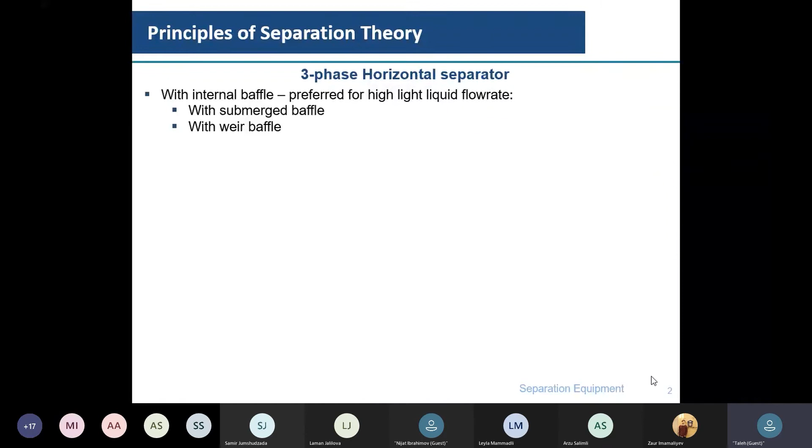This weir can be a submerged weir or submerged baffle. The second type is the weir baffle. In this picture, if you see my cursor, that's our three-phase separator.

Here with submerged baffle and with weir baffle, it means that in case of the submerged baffle, normally because after the weir we are collecting only oil liquid, our normal liquid level of the oil in this section is always higher than the height of the weir.

But in case of the weir baffle, we are always overcoming this weir in order to separate the oil liquid from the heavy liquid.

In the second part, we are using the separation boot. It's preferred for really low heavy liquid flow rates. And here, as you see, again it's a three-phase separator.

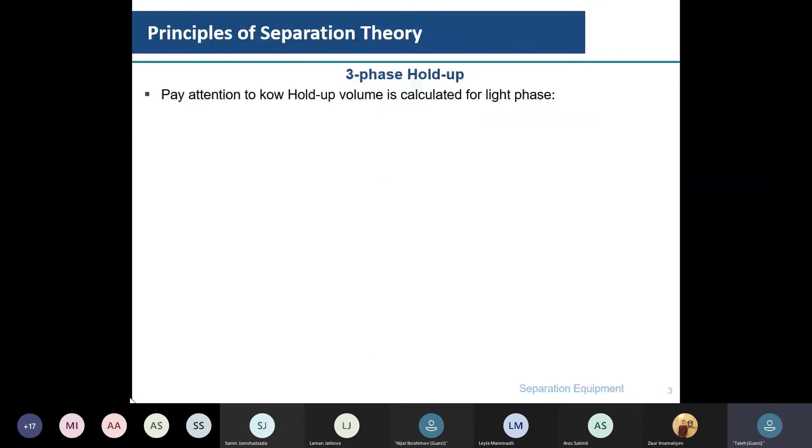Now let's go to the hold up - let's say the hold up volumes of the phase separators with internal baffle or with weir. Okay, that's our illustration.

Our oil level is always higher than the height of the weir. That's why, and we know that by considering the Bernoulli equation and the fundamentals of fluid dynamics, we know that we should normally have the same height here. Actually, we have some fluctuations, but in ideal cases, we have the same level.

Okay, always we are transferring our oil from this side to the section after the weir.

But in case of the weir baffle, we are always overcoming our weir. That's why we have the normal liquid level for the oil flow rate lower than the height of the weir. But here, the normal liquid level of the oil, even after the weir, is higher than the height of the weir.

And for the three-phase separators, in case of the boot, we are just simply having these hold up volumes. Let's again define this blue as our oil, and here we are collecting our water.

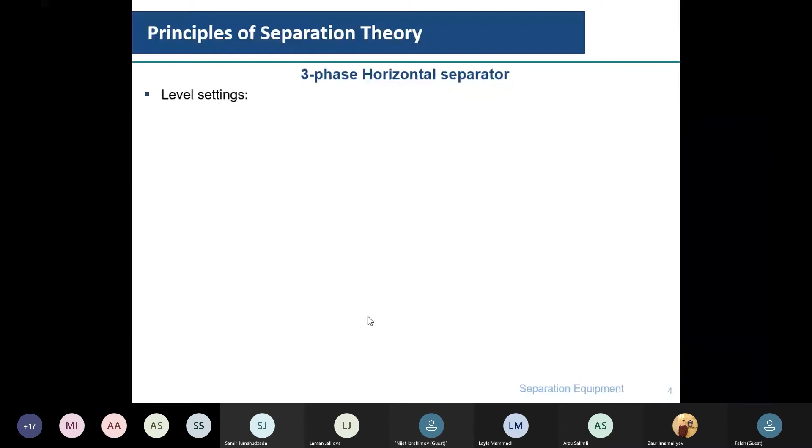The next step is about the three-phase horizontal separator level settings. Here for the feed inlet we are using a reversed pipe, but that's not the only rule. We can use several types as mentioned in the previous session.

In case of two-phase separators, we have only high level, normal liquid level, and low level, because for two-phase separators the liquid is only one phase. Inside the separator we have both the gas phase and liquid phase.

But in case of three-phase separators, we define it this way: that's our feed section, we have the gas phase, the light liquid phase, and the heavy liquid phase. That's why we should define and control the levels of each liquid phase.

Here we see high level, high level, normal liquid level, and low level. And here we see HHLIL, and here I is resembling the interface.

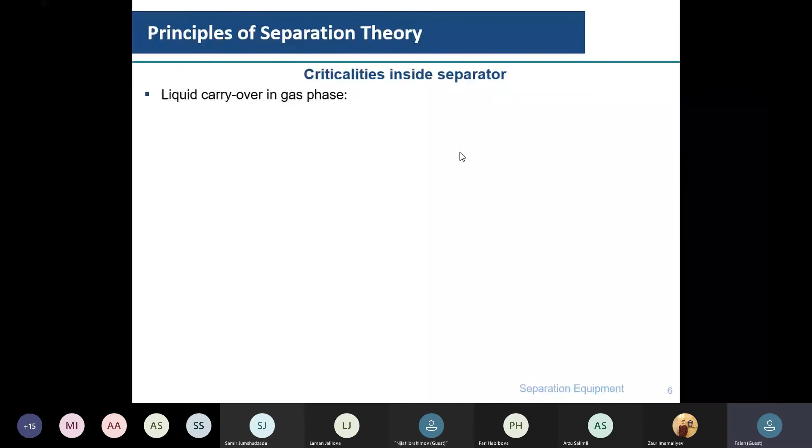What's liquid carryover? It means that the gas phase, the separated gas phase, takes some liquid molecules from the top of the liquid level, so the liquid phase is losing some already separated liquid particles in the gas phase. This affects our separation performance and the product specifications.

Liquid carryover is always present to some extent, but if it's unexpected, or the amount of liquid carryover is unexpectedly higher, in that case we can also lose the product specifications.

What are the reasons for the liquid carryover? The first one is excess gas velocity. In case of elevated gas velocities, we can experience liquid carryover in the gas phase.

The second one is the unexpected high liquid level. In the first case, we are giving energy to the gas phase because it has a higher velocity, and that's why it has more energy and can take liquid particles. In the second case, unexpected high liquid level, we are giving the possibility, not the energy, to the gas phase to take the liquid droplets, again liquid particles.

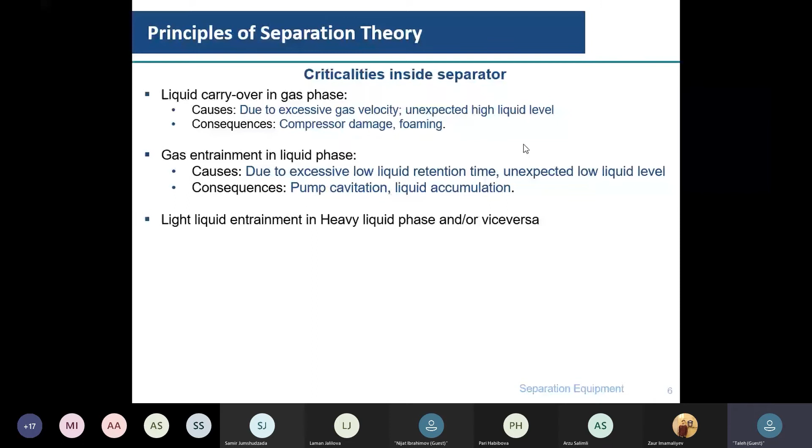And the second one is the liquid accumulation. It can cause liquid accumulation in the separator. The third one is actually the liquid carryover in gas phase, gas entrainment in liquid phase. The third one is the light liquid entrainment in heavy liquid phase, and vice versa. Actually, we also have heavy liquid escaping in light liquid, but the important one is the light liquid because the light liquid is much more precious, let's say the phase for our inside the separator, because mainly the light liquid, for example in case of oil plants, the light phase is defined as oil. That's why we don't want to lose our product, because in this case we are losing money. Okay, what are the causes, or what are the parameters that affect this entrainment?

They are the viscosities, densities, and the drop diameters of the liquids. Okay, and the bad sizing. In case of the bad sizing, it can actually be defined as...

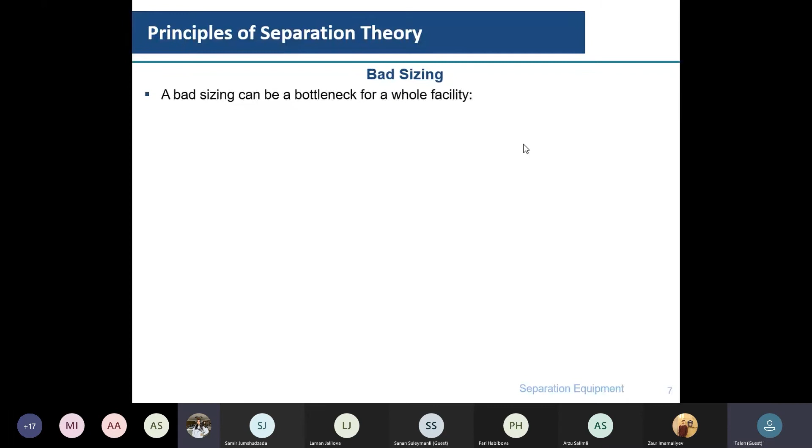Can I ask one question regarding liquid carryover? Sure. So you said that one of the consequences can be foaming. Could you please explain what you mean by foaming and how it will happen? Okay.

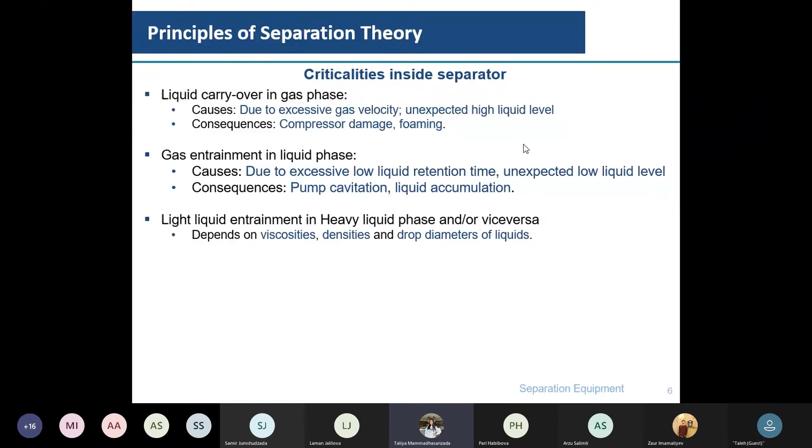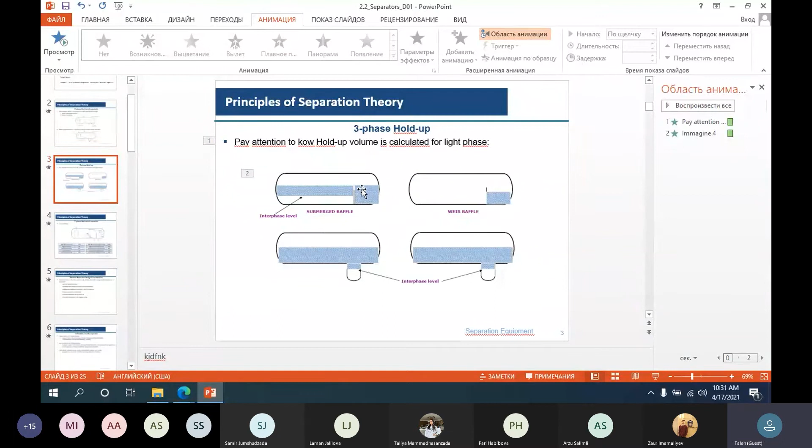Now let me take this one picture of a separator as an example. Let's say because we have the gas entrainment here, sorry, we have the liquid carryover here. Let's say that's our gas. What was your name? Sorry, I am Taliya. Taliya, please, in case of any doubts, just stop me and ask your question. Let's say that's our gas phase, right?

It enters and takes some liquid particles from here, but after taking the liquid particles, we don't have a smooth stream for the mixture of the liquid phase and the gas phase. Since our liquid particles are a little bit heavier, mainly we have some fluctuation, like a fog here, because the gas phase cannot take out all the carried liquid particles abruptly from the separator. That's why some of them are collected here for some period of time, let's say 2 seconds, 3 seconds.

But because it's a continuous phase, we have continuous foaming here. These gas phases take some gas particulates and liquid particulates here, and just leave the separator. But not all the liquid particles carried in the gas phase can escape the separator. Some of them are collected here, because we still have this gas stream, and because of the drag forces, because of the potential of these gas phases, these liquid particles are suspended here, kind of suspended, and they are making the foams in this section of the separator. I don't know if it was clear for you, Taliya, or not.

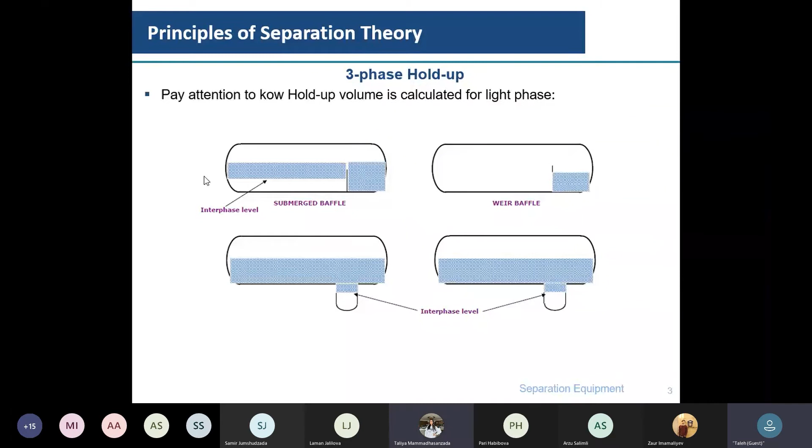That was clear for you? Yes, it's clear, thank you very much. Yes, that was the last one.

Okay, I think we were here. We have concluded light liquid entrainment. Now, the bad sizing. We can define that the bad sizing can be the bottleneck for the whole facility, because if our separator has not been designed properly, all the criticalities we have regarding the facility, the whole plant, will be those of this separator. That's why we should design the bad sizing properly.

We must always design our separators perfectly. Since we are now talking about separators, I am referring to them specifically. Firstly, if we have improper bad sizing, what should be the consequence of this?

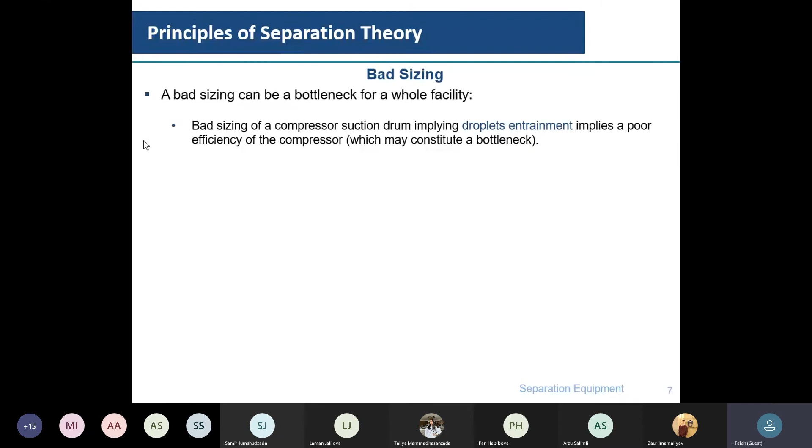If we have, for example, the suction scrubber before the compressor, and if we have not designed our suction scrubber normally or perfectly, in that case we can have liquid droplets at the compressor suction, and it can be very problematic for us, because we don't need liquid droplets in the compressor. We are always getting rid of these liquid droplets in order to avoid compressor damage.

The second one is the glycol dehydrator. For example, normally for the glycol dehydrator we use a flash drum, or an inlet scrubber before the glycol dehydrator. That's why if our inlet scrubber is not designed properly, we can have foaming in the glycol dehydrator, inside the absorption column.

Also, if we have not considered the entrainment, the liquid carryover, or the flooding regime of the separators, we can have flooding inside the separator, and for sure we would have off-spec products, meaning products which do not match the predefined product specifications.

And the last one, as we have already said, bad sizing can cause pump cavitation, because of low hold-up capacity, not only gas entrainment. We have already covered the gas entrainment, and that it can be very problematic for pumps in case of cavitation.

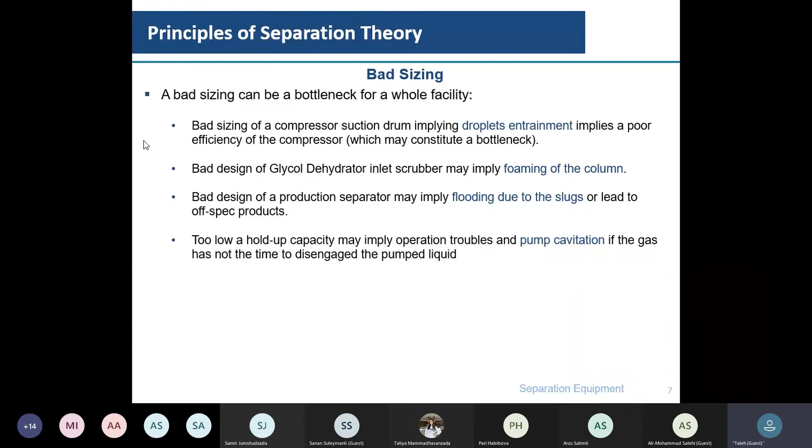Another case is the hold-up, because if we don't consider the NPSH during the calculation phase, if we have not sized our separators perfectly, in some cases we cannot match the NPSH requirements. We know that for pumps we have two types: NPSH available and NPSH required. If our NPSH available is not higher than the NPSH required, for sure we would have pump cavitation. That's why this is again another problematic point for our plant.

Okay, now let's consider the separator P&ID. I want to give you some brief information about the P&ID. That's our separator, actually a three-phase separator, because here we have the vortex breakers. Vortex breakers, as we already explained in the previous session, are used to prevent vortices inside the separator.

Here, these are the block valves, which we use in case of maintenance or some other case. They are normally open, and here we have the level control valve.

That's the level control valve for controlling the water level, or actually the interface level. This level transmitter and level controller take the interface level reading from inside the separator and compare it with the predefined set point. The level controller then calculates or determines the opening percentage of this level valve in order to control the interface level, or the water level, inside the separator.

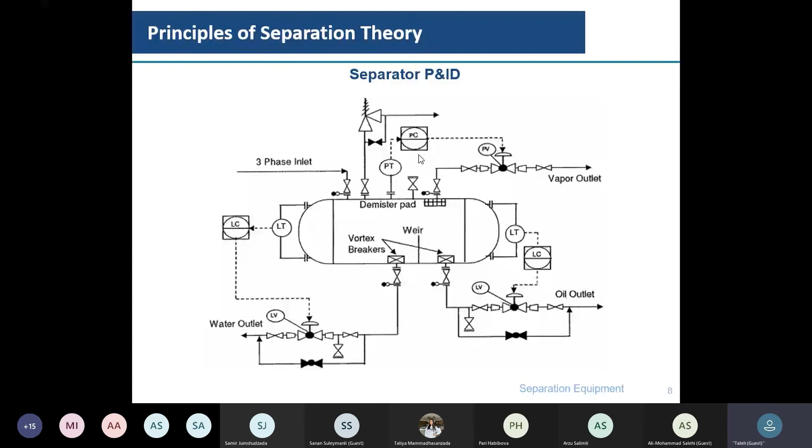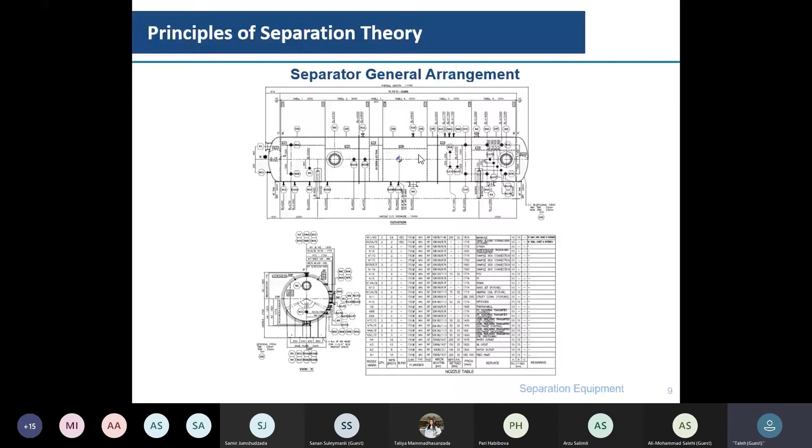I think that's all about the separator P&ID. The second one is a general arrangement of the separator. I think it's not visible for you - let me just zoom it out a little bit.

I want to give you some brief information on how to read the general arrangement or general drawing of the separators. We see here the nomenclature for the nozzles, for example M1, N16, N10, or others. Normally N resembles the nozzles, but M resembles the manholes. We have two manholes.

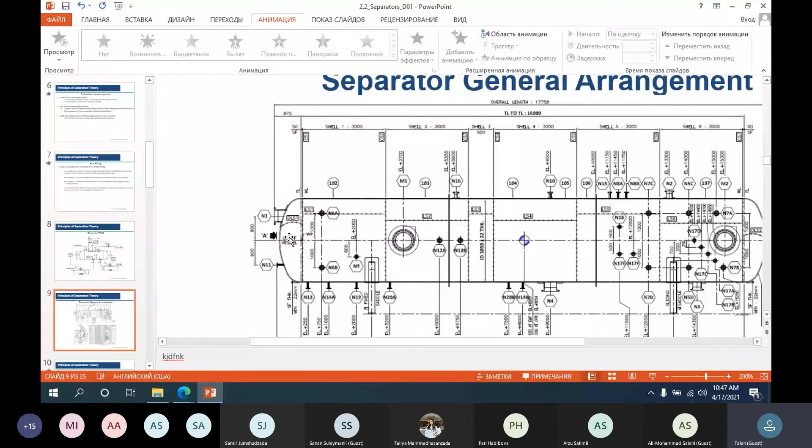As a young engineer or new graduate, if you don't have information about the identification of the nozzles, normally we have a table of nomenclature here where all these nozzles are defined. For example, M1 and M2 are the manholes.

These are the types of welding, and that's the schedule, for example schedule 40. How many manholes do we have here? Just two, and that's a 24-inch nominal diameter of the manholes, and that's the rating. The rating depends on the design pressure and design temperature, and also determines the thickness of the materials.

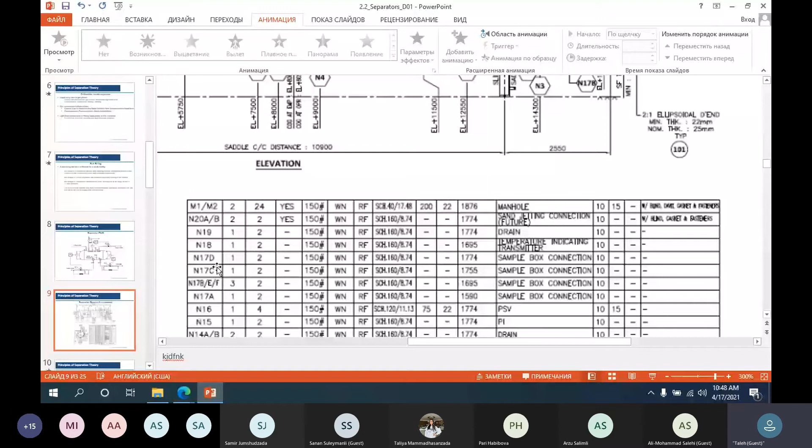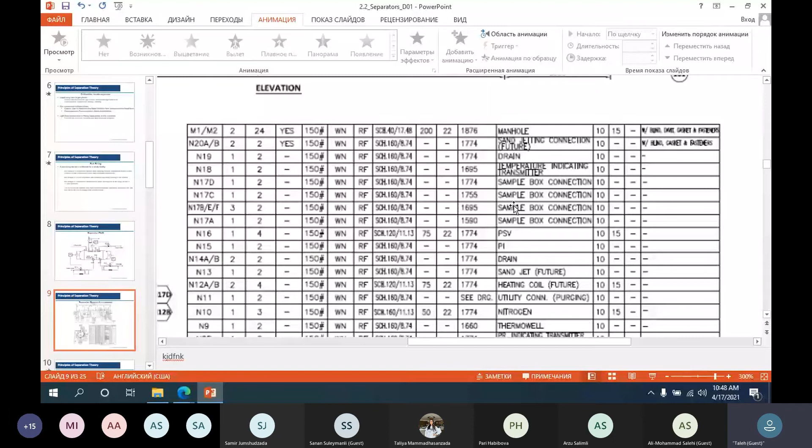We also have other types of nozzles, for example the sample box connection. We know that in order to check the performance of the separator, we have some sample points. We can say here N1 is the inlet nozzle, and N2 is the gas outlet.

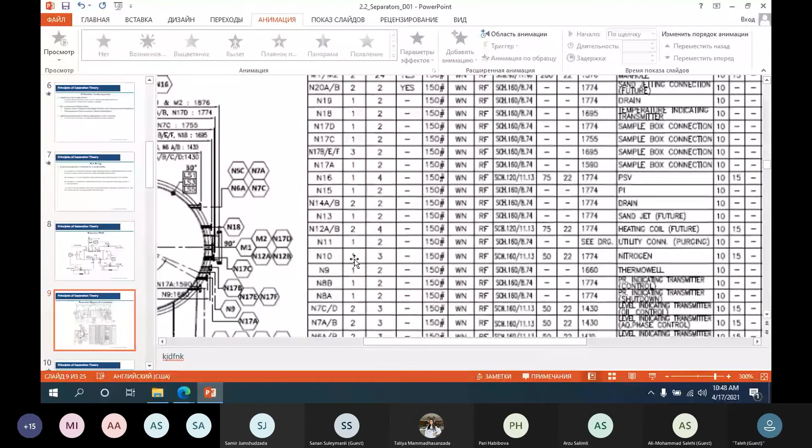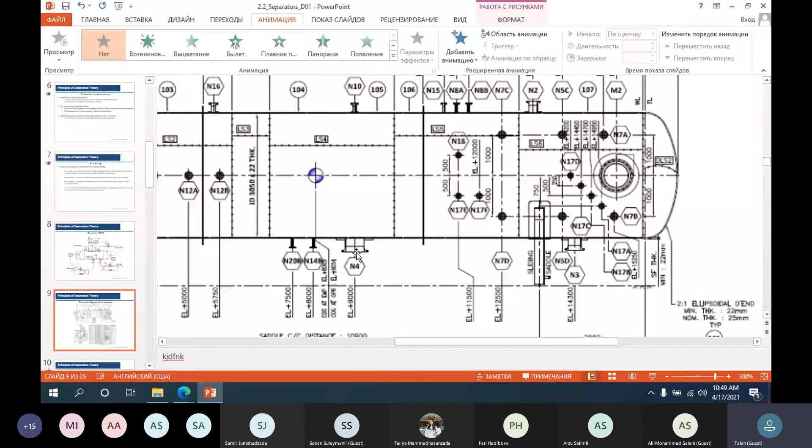N2 is just a vapor outlet. Now let's look for the N3 — that's the light liquid outlet, let's say the oil outlet. And that's the heavy liquid outlet, just the water outlet. I think that's all about the general arrangement of the surface separator.

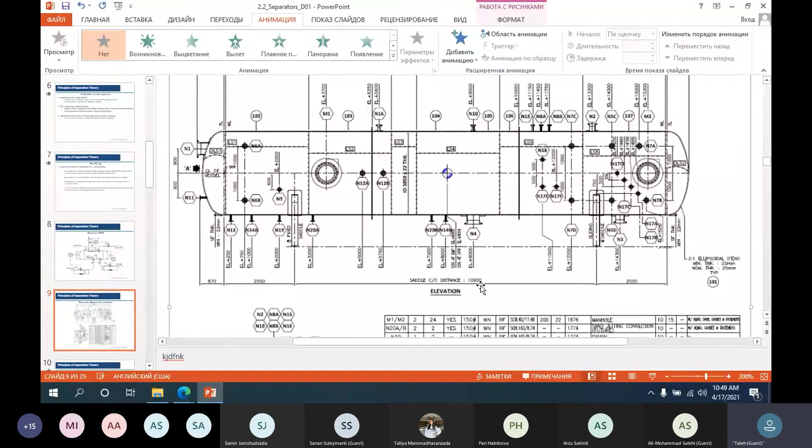One interesting point: during the design phase of separators, for three-phase separators we will have these parameters. This parameter is the inlet calming zone, for example in this case 2,550 millimeters. This section is called the effective length, for example in this case 10,900 millimeters. And this point is our weir.

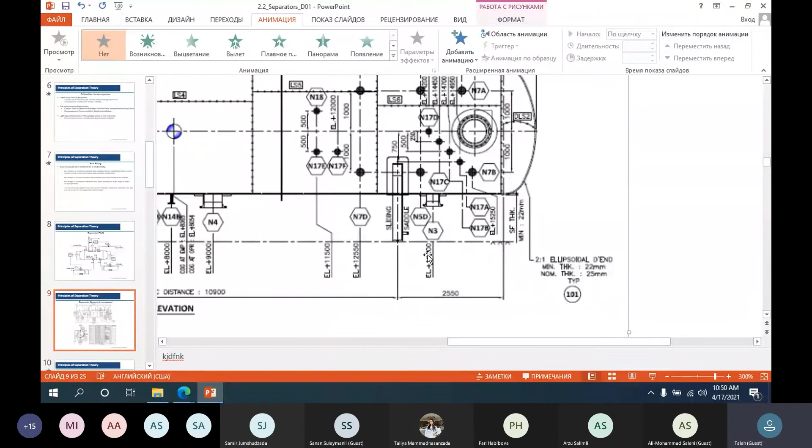If the scheme is not visible or clear, we can define the position of the weir by looking at the lens. For the three-phase separator we have mainly three sections: inlet calming zone, effective length, and the weir section. Now I think we can start the sizing of the horizontal separator.

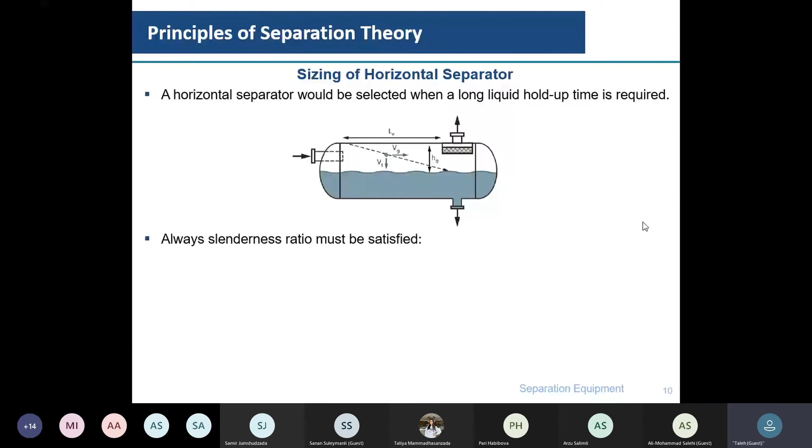A slenderness ratio must always be satisfied, because as a process engineer we cannot just design, for example, a distillation column with a half meter diameter and a 120 meter height just to match product specifications perfectly. We should also consider the workload of civil and mechanical engineers, because that type of equipment is not practical to mount vertically inside the plant — considering stabilization and vibration, it wouldn't be stable.

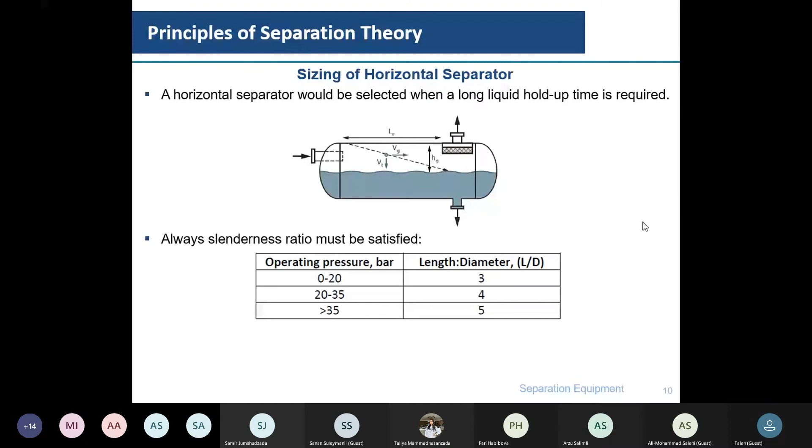That's why we need to consider the slenderness ratio, which depends on the operating pressure — there's a different range for each. Slenderness ratio is the ratio between the length and diameter of the separator. For the first range, where operating pressure is between 0 and 20 bar G, we should have a slenderness ratio equal to 3. In the range of 20 to 35 bar, we should have 4. For elevated pressure, we should have 5.

Now let's look at the steps of the horizontal separator design procedure. First, we should define the vapor volumetric flow rate — referring to the basic formulas of fluid dynamics, from the mass flow rate we can define the vapor volumetric flow rate. We do the same calculation for the liquid volumetric flow rate. The next step is defining the critical, or maximum allowable, gas velocity.

That's the important point. For this, we are using the Souders-Brown equation. The equation is in this way: depending on the K factor and the difference of the densities, liquid density minus vapor density, divided by the vapor density, and the square root of it multiplied by the K value. Now let's look at how this formula has been derived.

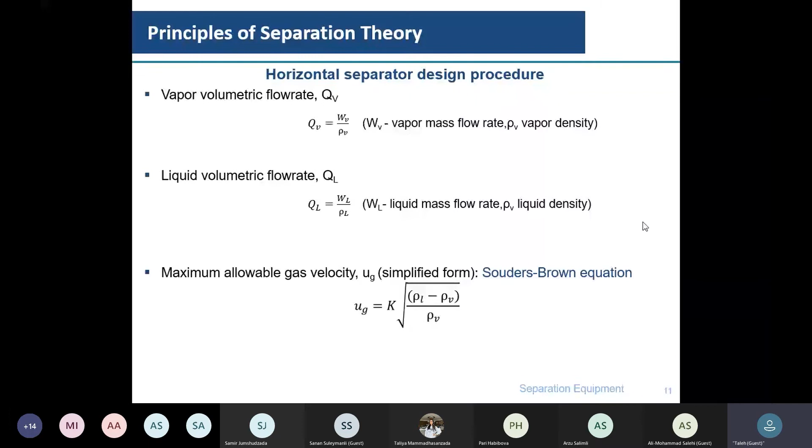Let's imagine that's our liquid droplet, and let's make the force balance on this particle. We have here the inertial force, and here we have the gravitational force exerted on the liquid particle. Here we have two kinds of force: viscous drag force and the buoyant force.

Because we imagine that this particle is moving in this direction, downward, the drag force is normally directed opposite to the movement direction of any object. Since the movement direction is downward, the drag force is upward. The buoyancy force always tries to take out the particle in the continuous phase. That's our gravitational force.

Let's define and recall the formula for this gravitational force. Gravitational force can be defined as 1 divided by 6, pi, d cubed, where d is the diameter of the particle, times rho, times g.

And for the inertial forces, we can actually ignore them in this case, because we are making the balance vertically, that's what—yep, yep.

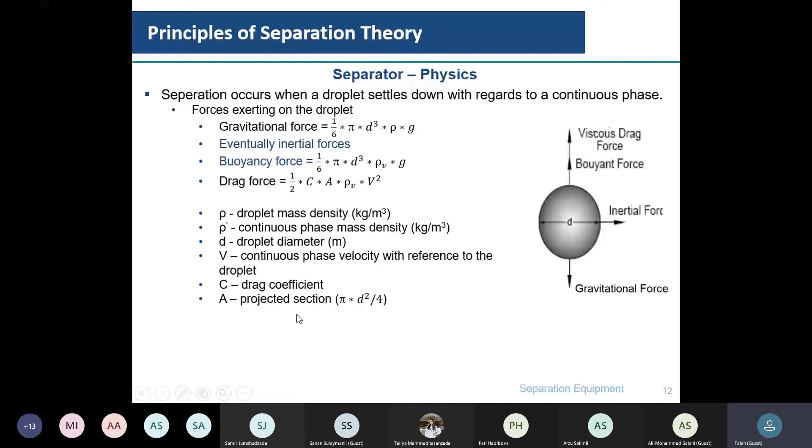I have already mentioned all the parameters. A is not exactly the contact area, but the projected section, though it's the same as the contact surface. If we make the balance between them, using Newton's equation, we get: the critical velocity is equal to 1.15 times the square root of gravitational acceleration times d, where d is the particle diameter, times the difference between the liquid density and the vapor density, divided by the vapor density, and c, which is the drag force coefficient.

We must define the drag coefficient, but how? Actually, the drag coefficient is a function of the shape of the droplet, but for simplification, we always consider spherical cases.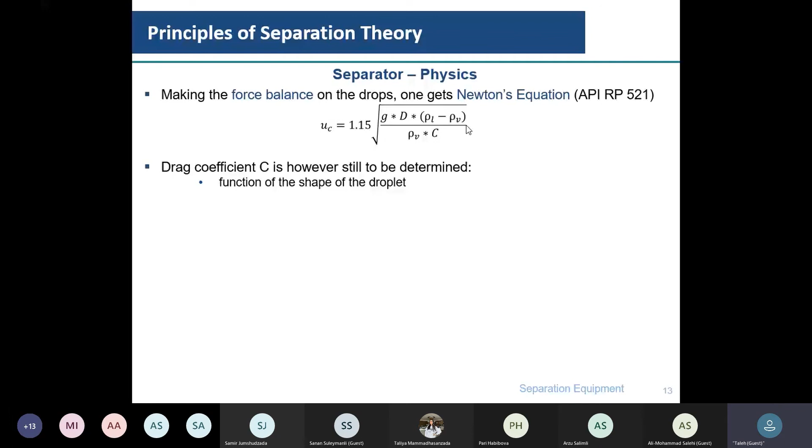The drag coefficient is also a function of the Reynolds number. The formula for the Reynolds number includes a factor of 1000 just for matters of units. The Reynolds formula is rho, density, times v, times diameter, divided by the viscosity.

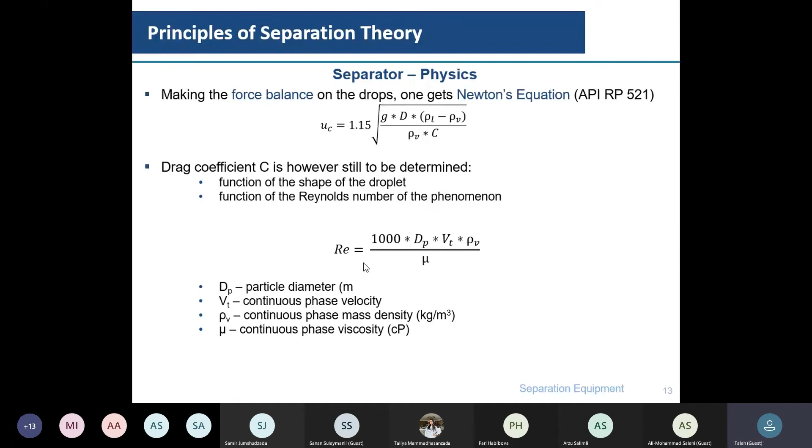And we should always consider the units of the components.

How can we define the drag force? Drag force is equal to, depending on the CD and the Reynolds number squared, we can utilize this graph to define the drag coefficient. How can we define the Reynolds number and the CD?

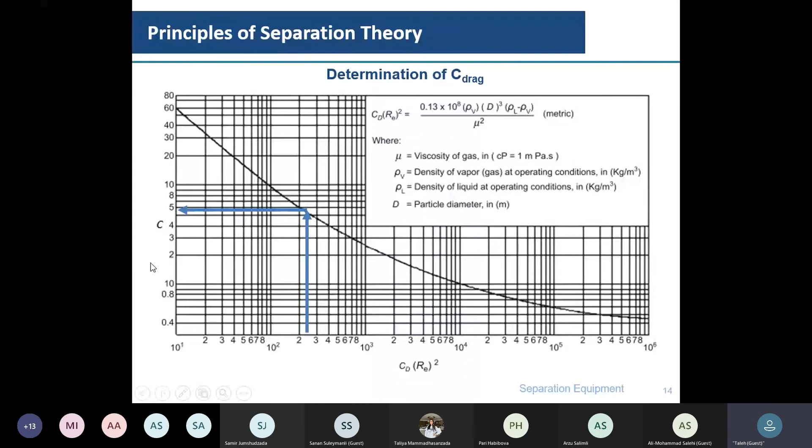We can use the empirical formula that scientists made for us. The unknown parameters are the vapor density, which we can find, the particle diameter, rho L minus rho V which we know, and the viscosity. It's very simple, and using this formula we can define the C and then put it into the formula.

Let's imagine the liquid-vapor two-phase separators. This is our formula, our Newton's equation for the critical velocity. The important point, please pay attention to this.

Also, when I was in my bachelor's degree, I had not realized this fact, or at least had not been informed of it clearly.

For separators, we must always consider the particle diameter - up to which level of particle diameter we need to separate, because we cannot separate all the liquid particles from the separator.

Yes, we can separate all of it, but in that case we should have, let's say, 20 meters for the length and just 5 meters for the diameter of the separator.

But at least, in order to match the product specifications, we should set some threshold for the liquid particle diameters. I will show you later some standard diameters for different applications.

Let's imagine the minimum separable droplet size is 180 micrometers, and let's assume the drag coefficient is one - just for simplification.

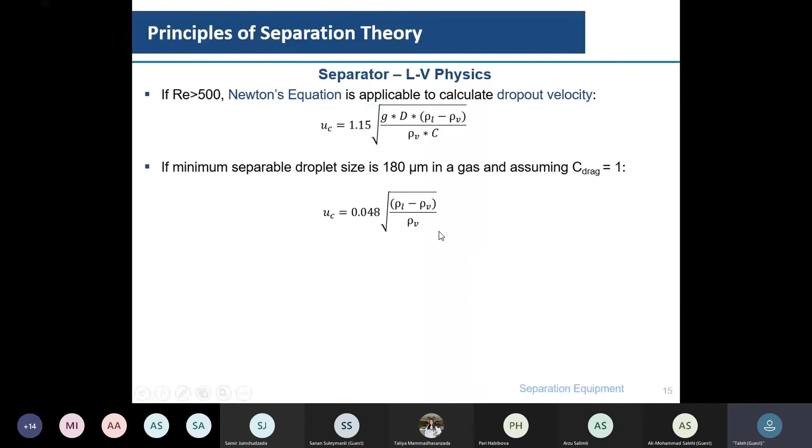Now we should define the K-factor, the K-factor in order to estimate the gas velocity. This depends on the configuration of the separator and other factors that we must define.

The ultimate gas velocity is equal to the formula K prime times U critical, which is calculated from the previous formula. Now let's brainstorm about how we can define these K values.

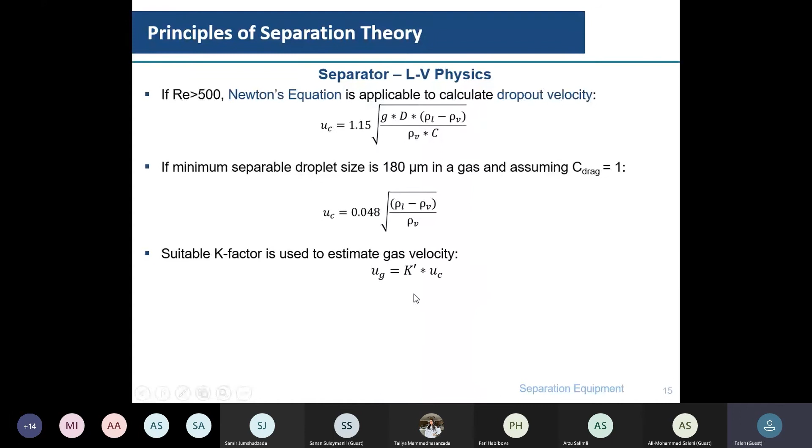Before moving to the K values, I want to give some brief information about the particle diameters, which I recall here. As I've said, different applications have different particle diameters, different droplet sizes for separation.

For example, in the case of oil separators, we are using these sizes, ranging from 150 to 180 micrometers.

I have designed one flare knockout drum, just one surface separator and one flare drum as a green field design. For rating procedures I have done a lot, but for designing from zero, from the feed phase, I designed the flare knockout drum.

In that case, I remember I used 300 micrometers for the flare knockout drum as the particle diameter, in order to guarantee the separation performance for the knockout drum.

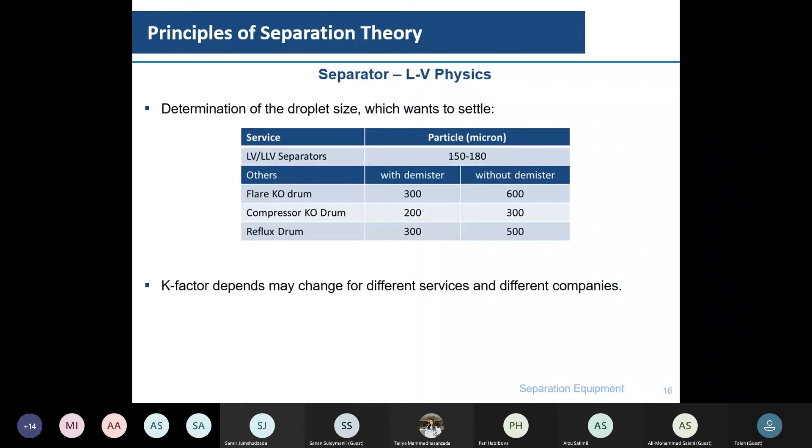Now returning to the K-factor. Depending on different services and different companies, the K-factor changes. Let's focus on the K-factor - in order to define the gas velocity, we must define the K-factor.

In order to calculate this formula, we have two methods. The first method, Method A, uses a table for defining K values. Depending on the length or height of the separator - height for vertical separators, length for horizontal separators - we choose one range.

But at the very early stage of the designing procedure, since we don't know the length of the separator, we can assume the separator length and choose the K-factor range from these tables.

Another methodology for this is as recommended in Campbell. We know that's the oil and gas reference book which is used very well in the oil and gas industry.

Firstly, we define the effective length, where effective length equals normal length minus diameter. Then we define these values: KSH equals KSV times effective length divided by diameter, and HG divided by diameter.

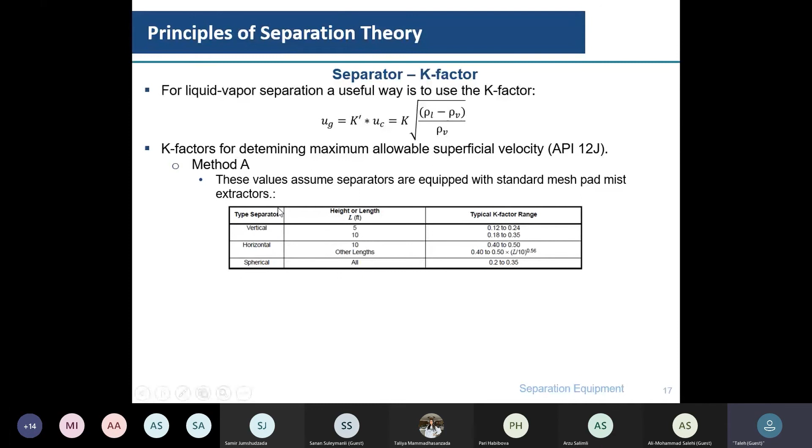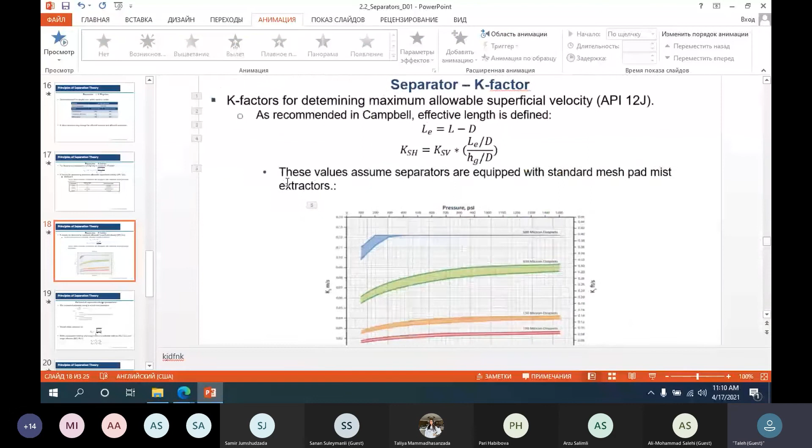Sorry, just one point - actually these values are assumed because the separators are equipped with standard mesh extractors if we are using this table. But sorry for the interruption, please ignore this sentence. Perfect.

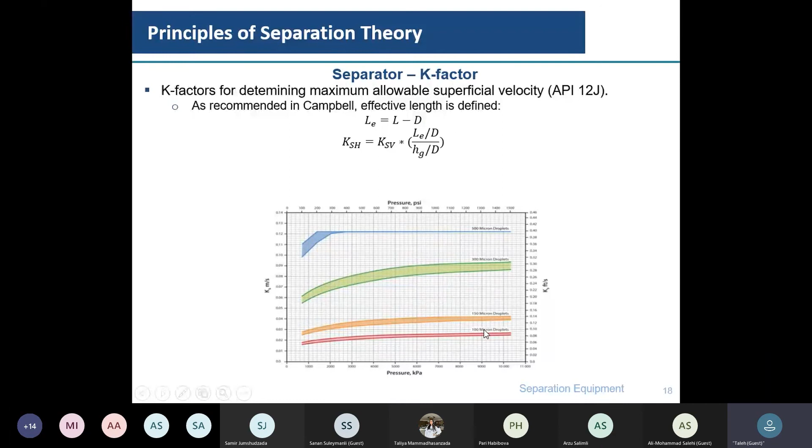Okay, but how can we define our key values? Let's say just from here we can choose our operating pressure. I don't know if you see the table or not - let's put it this way, let's make it in this way.

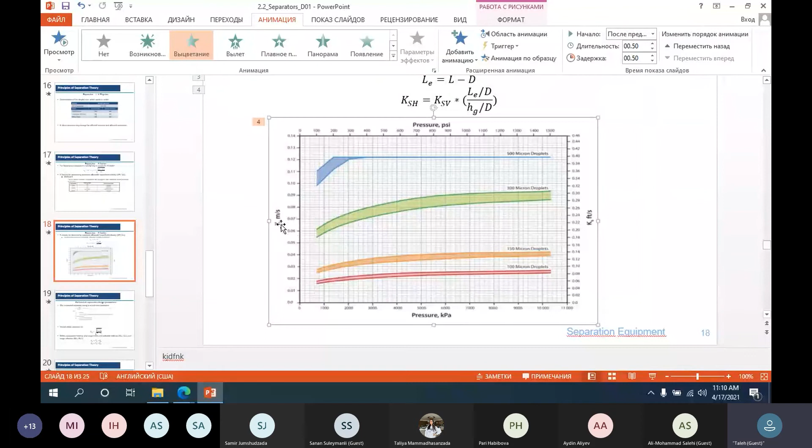For example, by choosing the appropriate droplet size - 500 micron, 300 micron, 150 micron, or 100 micron - and by defining the operating pressure, we can define the KSV values. From the KS values we can calculate the KSH values, and then we can put this value in the formula in order to define the critical gas velocity or maximum gas velocity.

The designing of the horizontal separator is just a trial and error procedure, because firstly we assume these values, these ratios, then we calculate KS values, then we calculate the maximum gas velocity. Then by using this equation, we define LE in this way.

LE is equal to 4 times T. T is the residence time, which we showed before. That's QL - QL is the actual liquid flow rate - divided by pi times D squared, where D is the diameter of the separator, and FL. We don't know the diameter yet, that's why we need to define the diameter.

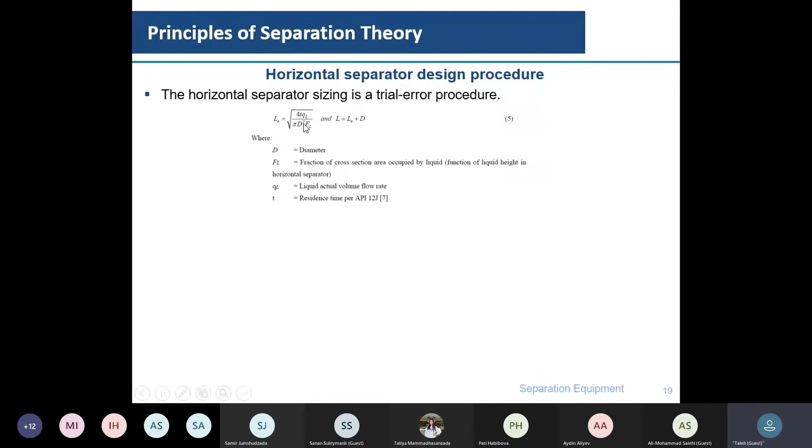again checking the slenderness ratio of the separator. If it's not in the range, we can change the parameters. For example, we can simply change the HG values in order to match some process parameters, process requirements.

And then the next step is to define the hold up volume and the surge volume. The hold up volume is the volume between the normal liquid level and the low liquid level, and the surge volume is the volume between the normal liquid level and the high liquid level. In order to define them, VH is equal to TH times QL, and VS is equal to TS times QL.

We have information about QL, but how can we define TH and TS? We have a predefined table to define them. Depending on the different applications, we have different numbers for the hold up times and surge times. By knowing this table, we can use another methodology

for determination of the separator diameter. Without having to calculate QV and UV, here we are only putting 4 times VH, VS, and 0.6 at the slenderness ratio. That's a much more simplified form for determination of the separator diameter.

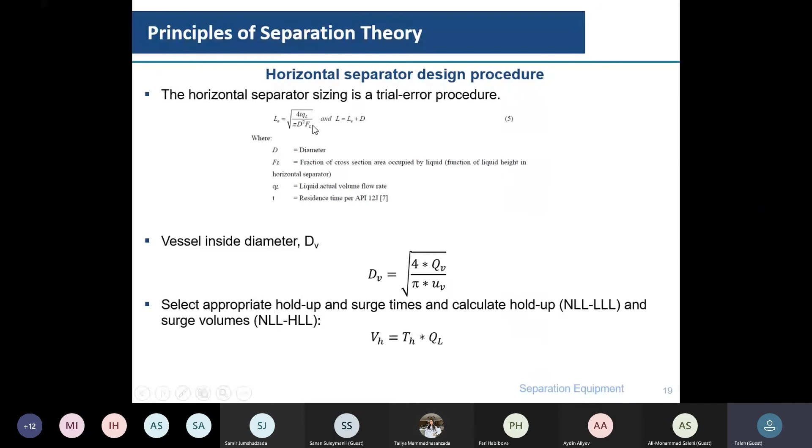And for the FL values, just one value - sorry for the inconvenience, you see here FL. What's FL? FL is the fraction of the cross-section area occupied by the liquid. How can we define this?

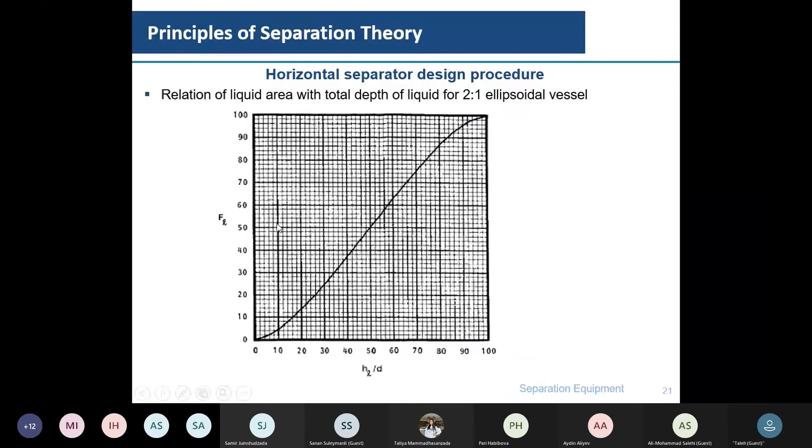Now I want to make one activity - let's make a brainstorm with you. Let's assume we have the slugging regime,

Let's imagine we have the slugging regime inside the separator, and let's say - what do you think, how can we avoid this regime? First, please let me know if any of you don't have information about slugging.

If you're not familiar, I can give brief information about slugging. In case of slugging, for the liquid phase, we have fluctuations in the liquid levels. That's why, for example, we have the risk of gas entrainment, or other criticalities. That's why we should avoid this slugging regime.

But how - and let's say we can't always avoid the slugging regime. Let's say we have the slugging regime - how can we optimize the separator performance? The optimization methodologies are a little bit peculiar, a little bit specific, which I have seen based on my experience, in some projects which I was involved in.

Talebe: So we said that slugging kind of creates turbulence inside the liquid, right? Perfectly. We kind of have these calm baffles, and it can create turbulences, so maybe we can...

Actually, the first solution is like that. Yep, perfectly. Your name is Pari, yeah? As I seen, Pari. Yes, yes, yeah, it's me. It's me, perfect, very perfectly.

Just really, bravo. I want to say just really we can use the baffles here, internal baffles for this. Okay, Pari, please don't mute your microphone.

Okay, let me just make another case study for you. Let's imagine the mitigation of the slugging regime, or just as you have said perfectly.

Let's imagine that we have the fluctuation on the liquid level, and we have the turbulence. That's why our control valves also cannot stabilize, let's say the liquid outlet from the separators are not stable. Am I right? Because we are just changing. Yes, and in this case we can give damage to the downstream equipment.

For example, we have the heat exchanger downstream the separators. For example, we are using the utility heat exchanger, and always, in every moment, we are changing the opening percentage of the utility side of the heat exchanger. We are closing, opening, closing, opening.

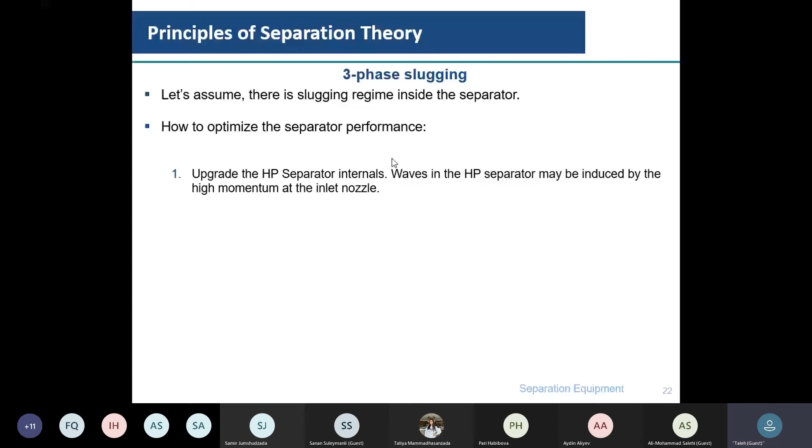It's the gap remote set point. Actually, that's not physical, it's a sensor thing, but imagine that we are putting a delay into the controller, and that's called the gap remote set point, and we are making it using the DCS, distributed control system, by inserting the measured variable.

If we define the maximum level alarm and the low level alarm for the separator: if our liquid level is higher than or equal to the high liquid level, the sensor always shows the maximum, the high level. Let's imagine we set the high level at 800 millimeters and the low level at 300 millimeters. The sensor measures 850 millimeters. In that case, the gap remote set point makes this 850 millimeter equal to the 800 millimeter.

We consider this value equal to the high alarm level. But in the low case, if the sensor measures 300 millimeters or lower, for example 250 millimeters, the sensor considers the liquid level equal to 300 millimeters.

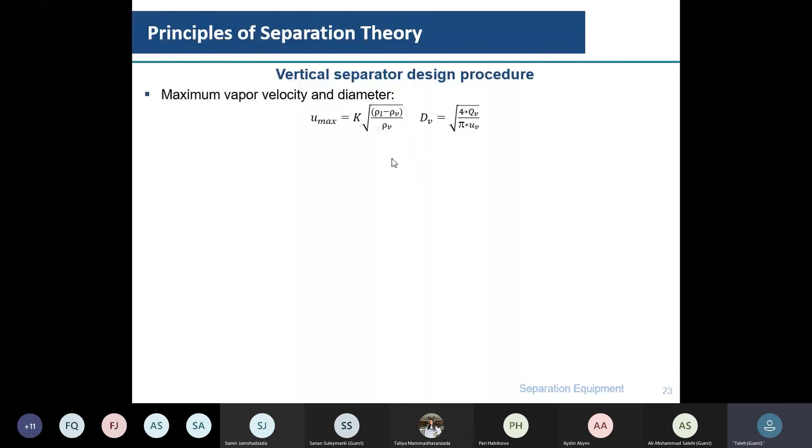For the vertical separators, we are again using the same formula: Umax is equal to k times the square root of (rho L minus rho V) divided by rho V. And dV is equal to the square root of (4 times QV divided by pi times UV). UV actually is the maximum velocity.

And here, that's our vertical separator. Here, that's our inlet, and that's the inlet diverter in order to decrease the momentum of the inlet feed. That's the liquid collection section, the liquid outlet. That's the interface, and the gravity is this zone.

It's the gas phase zone. We have the settling section. That's the mist extractor, and that one is the pressure control valve. Very simplified form. Now just here we have defined the diameter of the vertical separators.

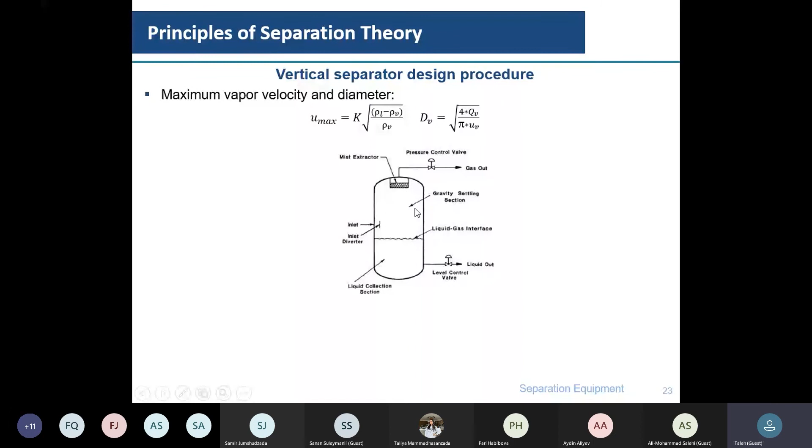Now let's look at the height of the vertical separators. How can we define them? Actually, we have the predefined methodology for that.

Let's say that we have H1, H2 till H8. Here we have the low level, normal liquid level, high level. And here it's the TL, the tangent line. It's the vapor outlet, liquid outlet, and that's the feed inlet.

Here, actually, we have this table in order to calculate H1, H2, H3, H4, and till H8.

For example, we know that the max is 15% of the diameter or 400 millimeters for the distance between the mist eliminator and the top side, for the top side and the mist eliminator. For the height of the mist eliminator, for example, 100 millimeters, if it's selected. And also other parameters, we can define all of them. Then we can sum up all of them, and then we can find the height of the vertical separators.

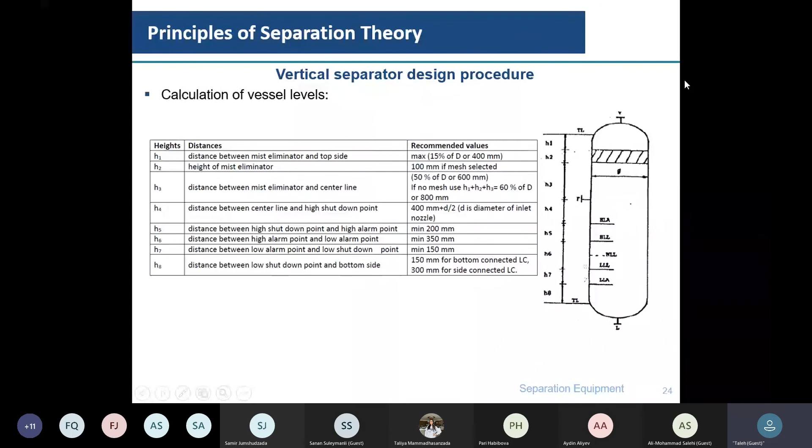My speech about the separators is all about these.

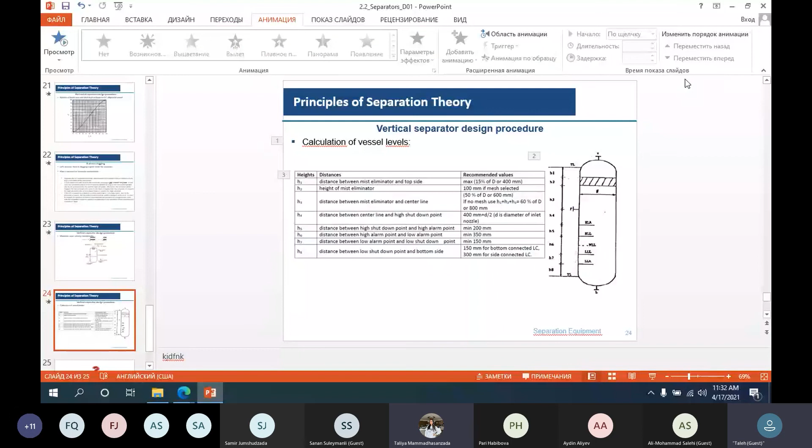I have a question about the DCS, modified DCS. A few minutes ago I asked the question, but let's say again: 300 is our low level alarm and 850 high level alarm. So in our case, could you please say the numbers again? Sorry for the interruption. 850 and 350. You said 300. Yes, these numbers are the same, 300 and 800.

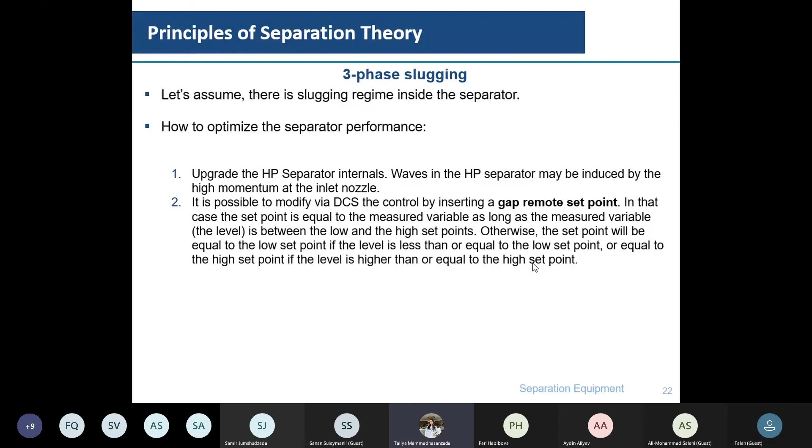We got 200, let's say 200 millimeters, which is less than the low level alarm, or 900, more than the high level alarm. And I cannot understand why we should take the low level alarm value now, for example, 300. Just because in the... No, no, no, please, let's just conclude your sentence. Sorry for the interruption. No problem. But I couldn't explain it, didn't just understood.

Yes, because Taliya, actually, I also put, let's say, 20 minutes just to talk with the senior engineer in order to understand this one. I know it's a little bit complicated topic. Let me just take one example here.

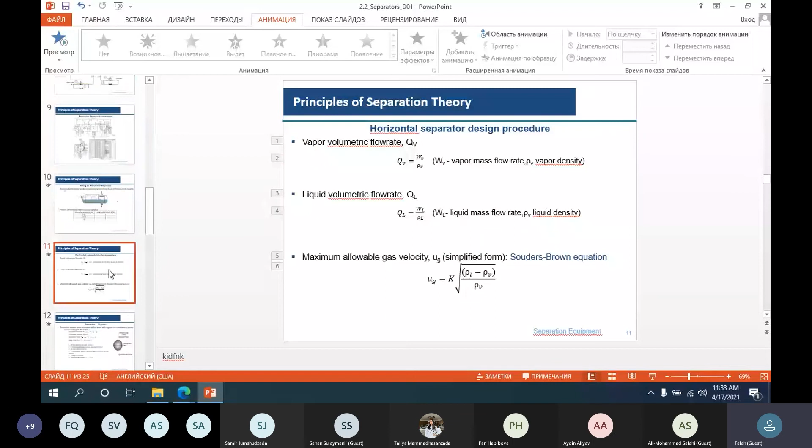Yes, minus set point. Okay, let's imagine that since we have the slug regime, we have 900 millimeters. In that case the error is 400 millimeters: 900 millimeters minus 500 millimeters, in absence of the gap remote set point. And the controller takes action for the difference of 400 millimeters.

That's why it closes much more, let's say, than a normal level control valve would, right? But let's imagine that if we have inserted the gap remote set point...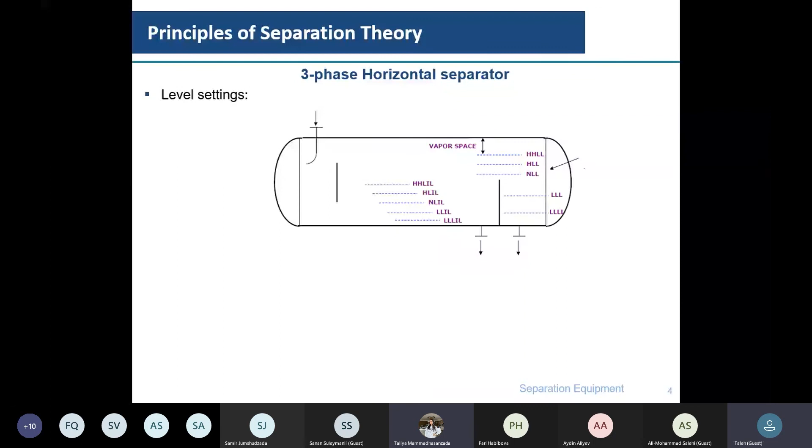But what was the point which is unclear for you here now? It was clear now, but most probably after the session I will have some questions about it. Perfect, when I think of them, I will ask again. Perfect, perfect, perfect. Okay, other questions regarding this?

May I? Sure, sure, why not? I wanted to clarify this surge volume. I understood the hold-up volume, but surge I kind of didn't get that much. What was the surge exactly? The definition of surge in separators?

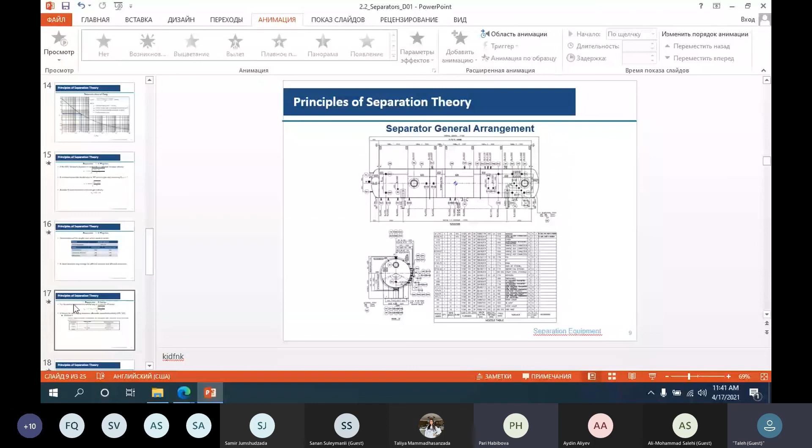Actually, the hold-up volume is the volume between the normal liquid level and the low liquid level, and the surge volume is between the normal liquid level and the high liquid level.

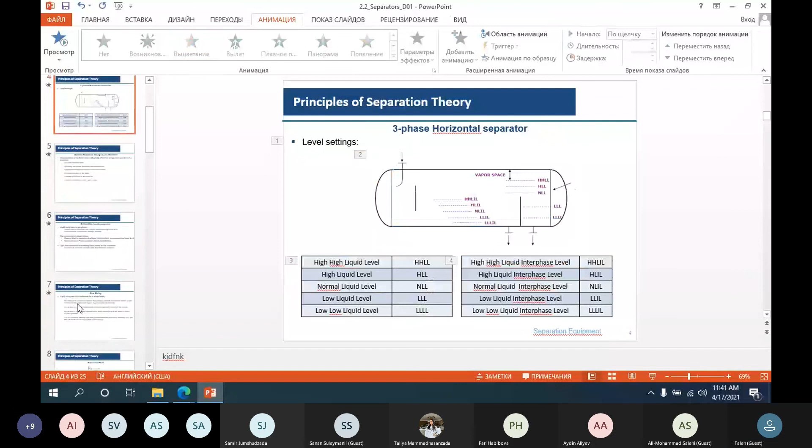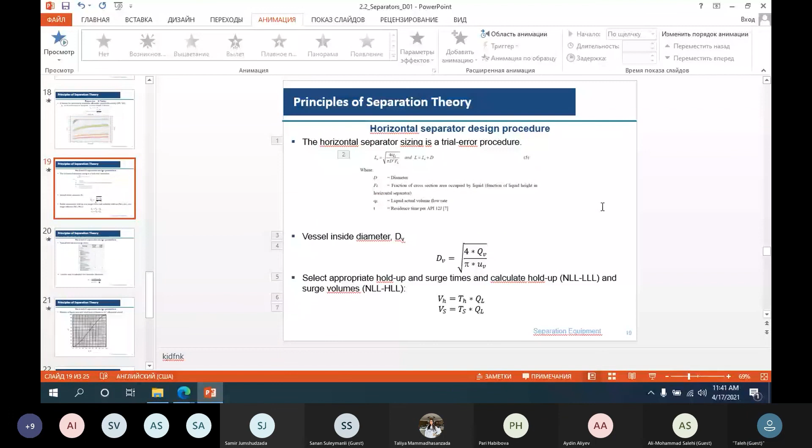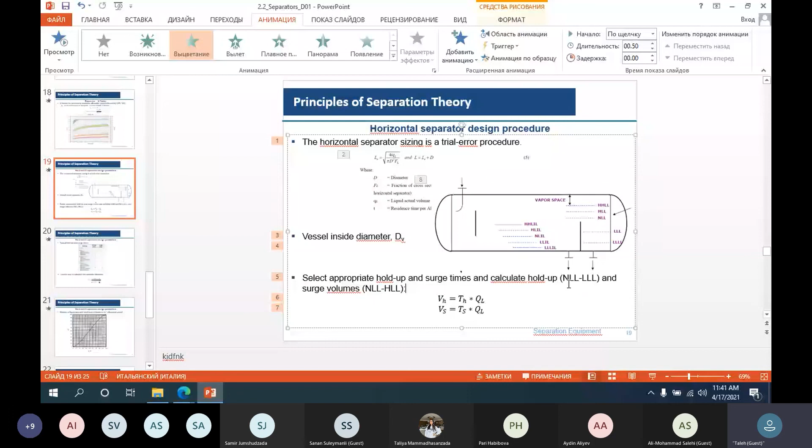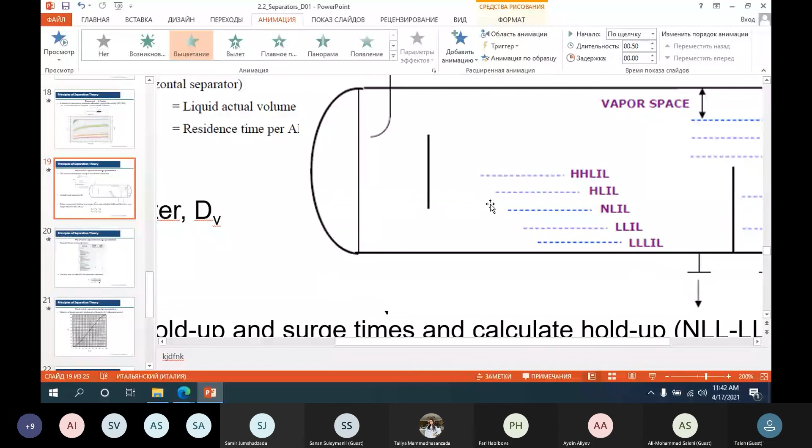Now let's go to this section, the liquid level... let's copy this here. Okay, actually the hold-up volume is the volume between the normal liquid level and the low liquid level, the liquid volume from here till here. The surge volume instead is the liquid volume between the normal liquid level and the high liquid level. That's the surge volume, we have defined it in this way.

So, for example, if the surge volume is too high, does that mean there is more gas at the upper side? No, no, no, no, no, that's a low liquid level. We are always talking about the liquid, surge volume of the liquid and hold-up volume of the liquid.

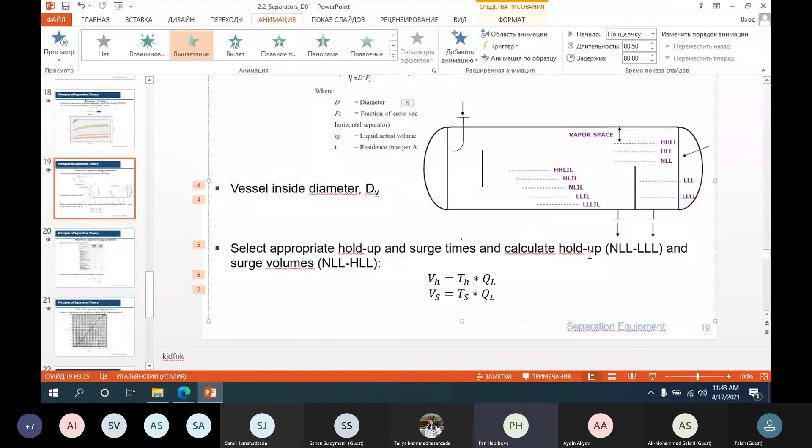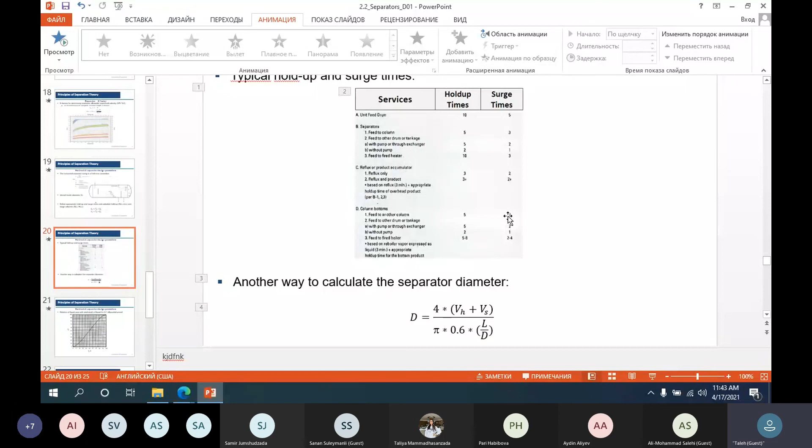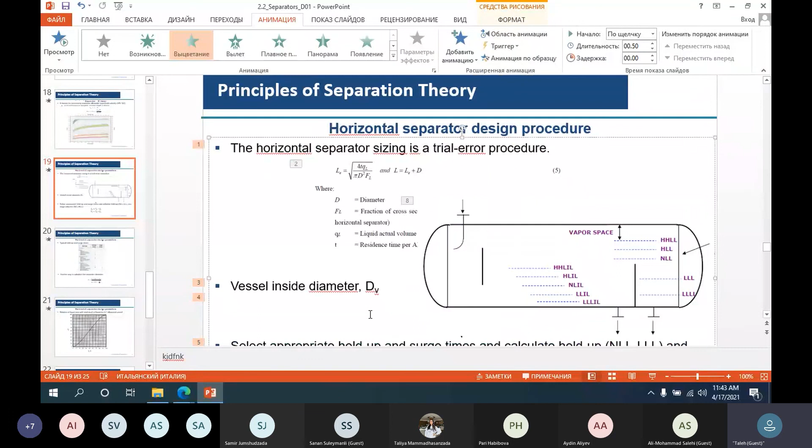Why do we define those values? Just because, as we see, we are always using these predefined values. Let's say normally we have the high liquid level - but in case of the high liquid level, which signal are we receiving? The alarm signal that we are reaching the emergency case high liquid level, because after the high liquid level we will reach the high-high liquid level, which will trip all our plant, at least the separator. And the low level is the same - it will shut down, for example, the pumps downstream of the separator.

That's why, for safety purposes, we should give some time to operators or personnel on the plant to take action. For the hold-up and surge volumes, in order to have stable operation, we should guarantee that we have sufficient time between the high level and the normal liquid level. It means that if the level reaches the high liquid level, it means we really have a kind of emergency case.

If we put the 1 minute - because in case of control of the liquid level or the process, we cannot say the liquid level is always at the normal liquid level. It's always changing between the high liquid level and the low liquid level. If we consider the delay time of the sensors, the delay time of the level controllers, the level controller valve delay time - all these facts - we should give this time to the level controllers before showing the alarms.

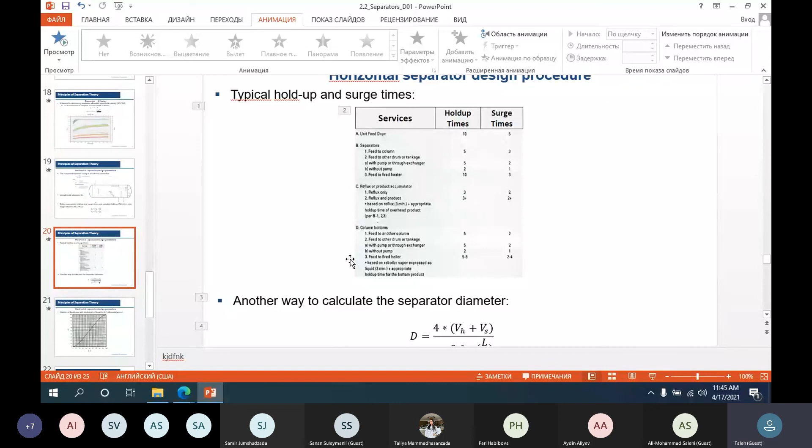Let's say if we put the high liquid level just above the normal liquid level, for example 60 or 70 millimeters over the normal liquid level, in this case every second we will receive the high liquid alarm, and because of the noise we cannot stand in the plant - always red alarms, always we have alarms. That's also the case for the low liquid level.

In order to have safe and stable operation, we are giving these values to the surge volume and the hold-up volume, in order to guarantee the normal operation, because our liquid level is not always equal to the normal liquid level perfectly - we are always trying to operate exactly on this point, but we never reach it, so for a long period we cannot reach it. That's why we should take the margin between the high liquid level and the normal liquid level, also the normal liquid level and the low liquid level, in order to guarantee the normal operation. Because if every moment we receive alarm signals, we will work in the plant with anxiety.

I think Pari, yeah. Yeah, yeah, I got it. I got it, that's clear. Yes, really clear for you. Yeah, it's perfect, clear. Perfect, thank you.